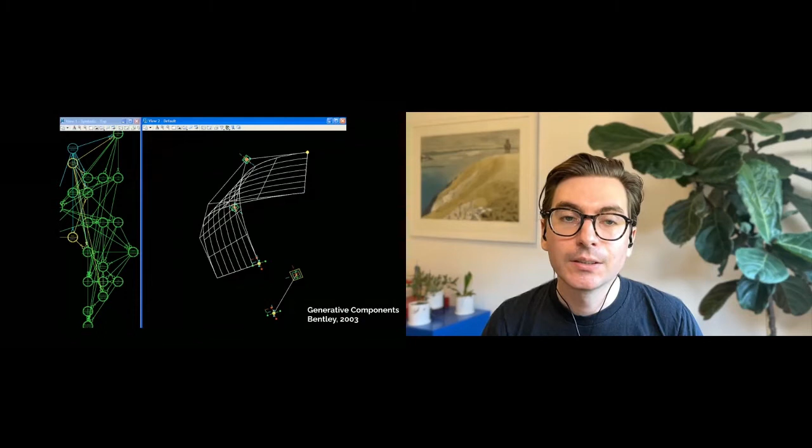So tools like Rhino and Grasshopper became popular, not because of how efficiently they did the regular stuff, like the vertical walls present in 99% of projects, but rather their ability to do the unique stuff. And CAD companies took note and followed suit, releasing updates to their software that really stretched the ability of software to reach further and further down that uniqueness spectrum.

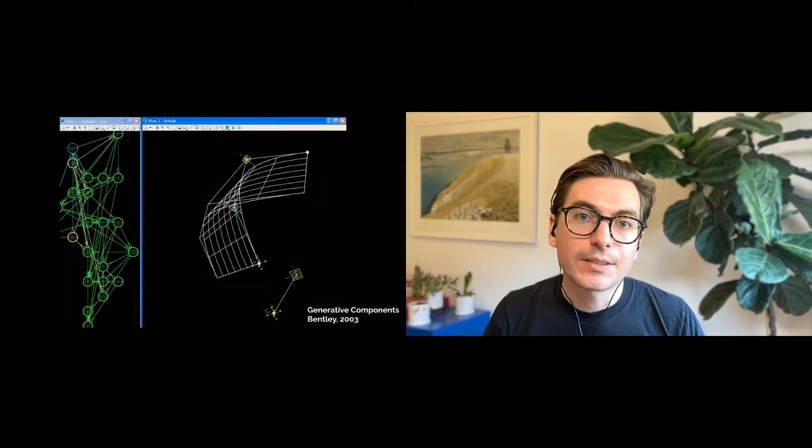Designers weren't just pushing the boundaries of uniqueness for the sport of it. Underlying all these efforts was a feeling that architecture was limited by its design tools. By pushing against these constraints, there was this implicit hope that it would expand the design vocabulary and open up new avenues of expression.

The first projects might be challenging, but presumably everything would become easier with time. If you take that to the logical extreme, you end up in a place like parametricism, which is predicting that the long tail is going to flip, right? That advances in design technology would progress to such a degree that soon every building would be unique, irregular, curved and different.

And of course, this didn't happen. Instead, we seem to basically reach a point of diminishing returns. So projects with doubly curved surfaces and parametrically generated facades began to feel like this magic trick that was used one too many times. The outcome was no longer surprising.

And without the novelty, there wasn't that much worth celebrating. The buildings weren't any more affordable, more abundant, more sustainable, or necessarily more pleasant to inhabit. As such, I think you're starting to see that the enthusiasm for the long tail is beginning to wane. And in its place, people appear to be shifting their focus to the middle of the uniqueness spectrum.

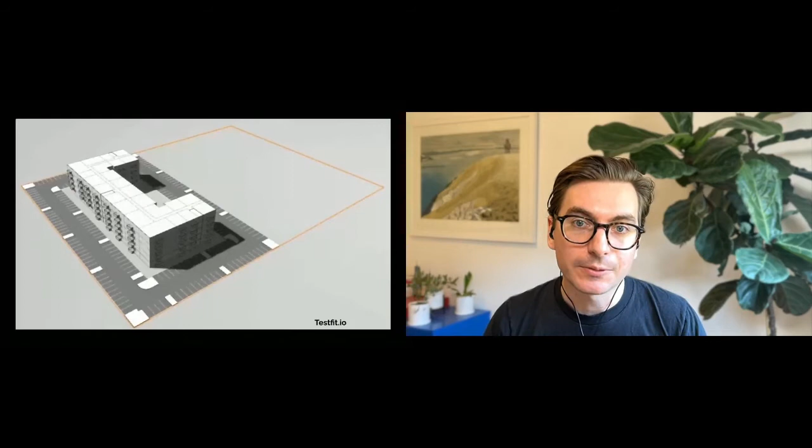It sounds simple enough, but having software automatically generate a building is actually pretty cutting edge stuff. A decade ago, you would only find this level of computational prowess on really big, expensive projects by famous architects. But here it's being applied to ordinary apartment buildings, car parks, and hotels.

And these are projects that are right in the middle of the uniqueness spectrum. Each project is a little different, normally due to site constraints, but they never stray too far from a template of fairly conventional project topologies. And I don't know, that's fine.

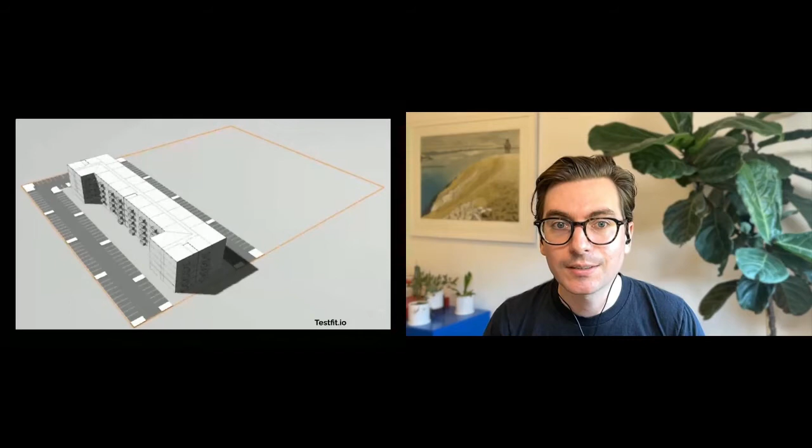I saw a similar thing when I was working at WeWork a couple of years ago. Back then, WeWork had this incredibly sophisticated method for delivering projects. Technologically, it was far beyond anything I'd seen anywhere else in the industry. But when you walked into WeWork's co-working spaces, it just looked like a regular office with nice chairs and fancy couches. So although there was this computational sophistication, it wasn't necessarily overly expressed in the design.

Just to give you a sense of some of what was happening on the back end here, this is a project that was done by, or led by, Carlo Bailey at WeWork and the research team. Here's basically making predictions about which offices would sell. So taking all of this Revit information that WeWork had, extracting all of that.

Well, there was another team extracting all that data and turning it into a database. Then he took all of that data from the database, combined it with all the sales databases, and then used machine learning to make predictions about which offices were going to sell based on physical attributes of the office. So really sophisticated combination of BIM data, operational data, machine learning.

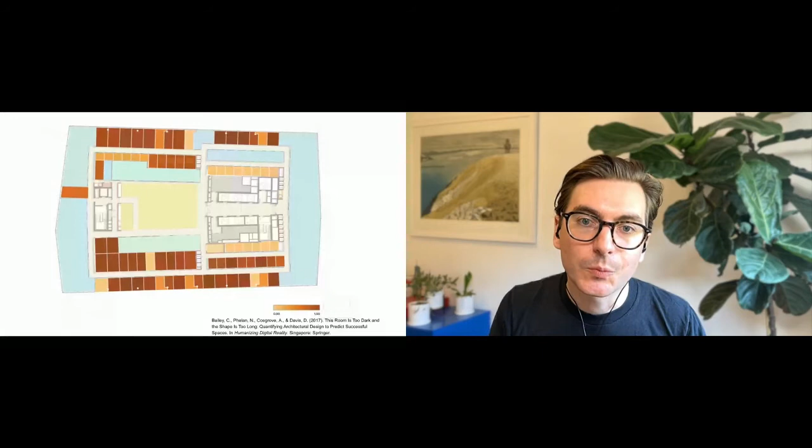But when you walked into a WeWork office, there's nothing that was sort of screaming like, this is the absolute pinnacle of what's possible in CAD right now. This is the product of these really advanced computational algorithms and laser scanning and this really polished pipeline of BIM data. This is what $1 billion in venture funding from the Saudi government buys you. It just looks like a normal kind of office.

And so I find this shift to the middle interesting because you're seeing so much computational expertise at the moment being brought to bear on what are really just such ordinary projects. And I know that calling these projects ordinary sounds like a critique, particularly if you come from a generation where you were rewarded for these difficult and unusual projects.

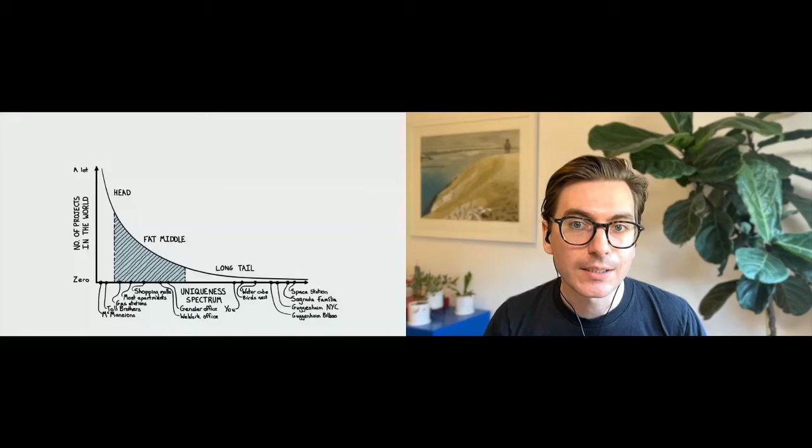But I think there's a dignity in the ordinary. Now, most of the built environment isn't landmark projects with big budgets. It's normal, inconspicuous projects that you don't really think twice about. And I think this is really where one of the opportunities lies, the fat middle of architecture.

These projects are challenging because there are so many financial constraints on them, so you can't afford to get too wild in what you're designing. But then there's also this overlay of practical considerations. You can't duplicate past work and expect it to work on a new site because the sites are so constrained and because there are so many other constraints on them.

And in many ways, I think it's the perfect problem for computational design. And more, I think you're going to see CAD turn its attention to this segment of architecture, shying away from the extraordinary in favor of making ordinary buildings better.

The second concept I want to explore here is the idea of verticals over horizontals.

So in the lead up to getting married, I had to get a ring. And obviously, buying a ring is a huge story, but I'll just tell you one tiny unexpected detail. The jeweler used Rhino to design the ring. This isn't part of the engagement story I normally tell my family, but since you're all here to hear about the future of CAD, the jeweler using Rhino, to me, it's a big deal.

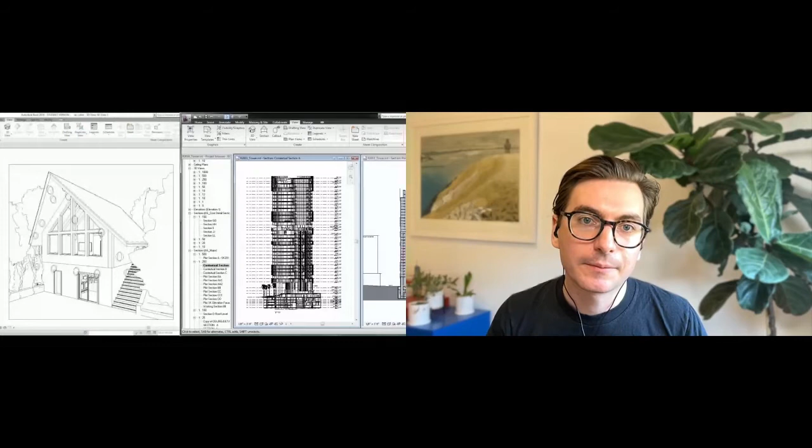These two things are totally different, yet we expect Revit to accommodate both of them and then some. Because Revit stretches across so many different project topologies, it struggles with the specifics of each of them.

For example, people have been using Revit to design apartment buildings, and they've been complaining for over a decade that Revit can't count the number of units in a building. There are screenshots from the Revit forum back in, I think, 2011, people complaining about Revit not being able to count apartment buildings. Sure, you can mess around with room schedules and write a Dynamo script, or buy a plugin to export and display this data. But all of that feels like a really complicated workaround.

Software that specializes in designing apartments, such as TestFit, performs these calculations out of the box. So why does Revit make it so difficult?

Many of us will blame Autodesk and say they're not listening or moving too slowly. There's been this open letter to Autodesk recently, and this is an article I wrote about it. But I'd like to posit an alternative explanation other than 'Autodesk is lazy.'

I think that's really that Revit is horizontally integrated. In most cases, it's better for Autodesk to add features that benefit their entire user base rather than adding features that serve only one vertical.

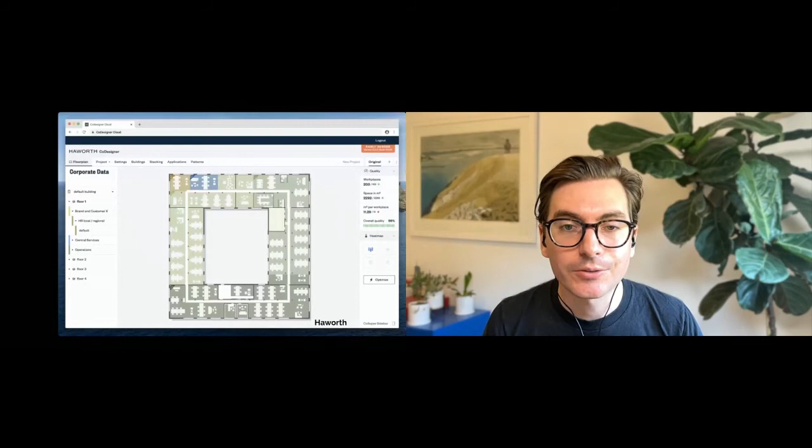So one example of what this might look like is Haworth's CoDesigner. For those who don't know, Haworth is a furniture company, and they made this design software, or contracted out to another party to make it for them. They give away the software basically as a sales tool.

You can see already just from the screenshot that out of the box, they're doing a bunch of calculations, such as counting the number of workstations, calculating the density of the workspace, even scoring the quality of the workspace. All these calculations are definitely possible in software like Revit, but would take a lot to set up. Here they're all out of the box, ready to go.

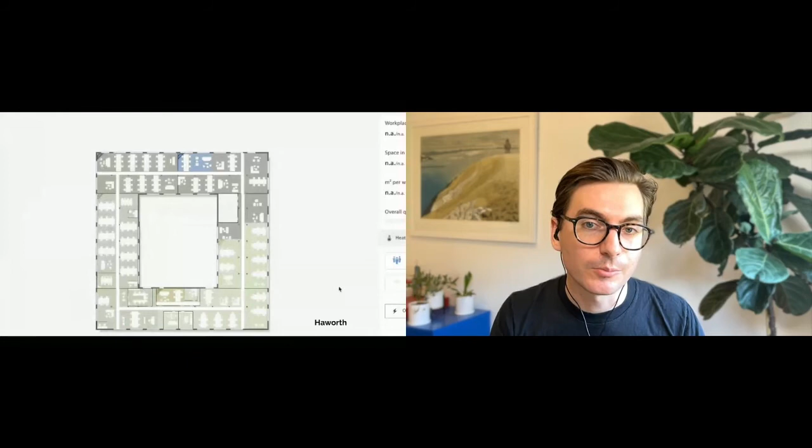This GIF is super fast, and I'm not sure if it'll show up for you, but basically in their software you can just drag rooms around. So it's generative, interactive, and you can move things about.

This is probably one of the more interesting parts of their software. What you're seeing here is a stacking diagram. In office design, it's typical to have all the floors represented and work out which departments fit into which floors. Typically, workplace strategists or architects will use something like Excel or Illustrator to create a diagram like this, so it's totally disconnected from the design process. You basically create the stacking diagram, look at it, use it, and then throw it away because the design exists in another piece of software.

But here, because it's done in their software, which is focused on this one vertical, when you make this change to the stacking diagram, changing where particular departments are within the office, it automatically changes the floor plan. So you have this vertical flow of data from the early stages of briefing through to the finalized layout, going backwards and forwards in this software.

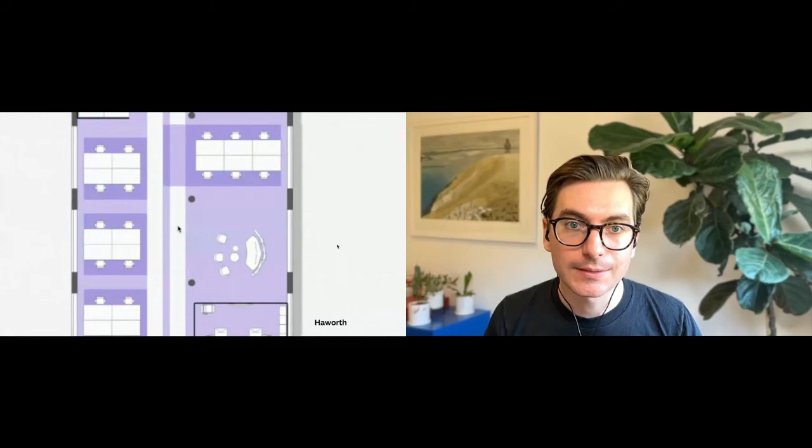It also has a bunch of generative stuff around placing desks. Again, this isn't impossible in other software, but because it's baked in, it's much easier for people to access. There's this interactive corridor tool, which shows off some of their bidirectional generative design capabilities, doing things like evaluating floor plans based on metrics that are important for people laying out offices.

So basically what you have is this very specific application designed for an incredibly narrow vertical. You can't use Haworth CoDesigner to design a house, a stadium, or a cultural institution. You can't even design the outside of an office building. All you can design within it is the interior layout of where desks and furniture are within an existing office building.

And because it focuses on this one vertical, you get a lot of things out of the box that just aren't available in other software, or that would have been possible but are really tricky to implement. It's just an interesting example of what the future might hold, particularly when you have a furniture manufacturer making this incredibly sophisticated interactive generative tool just for the purpose of sales.

The final concept I'll touch on briefly is the idea of made-to-measure versus mass production. To be fair, this is probably the least thought-out section of the presentation, so it'll be somewhat brief, but I'd love to get your feedback on this as well.

I think in the industry we really have this obsession with making architecture like we make cars and planes. This goes back decades, but I pulled out a couple of examples of recent startups that have been talking about their design process in relation to industrialization, using cars and planes as a metaphor.

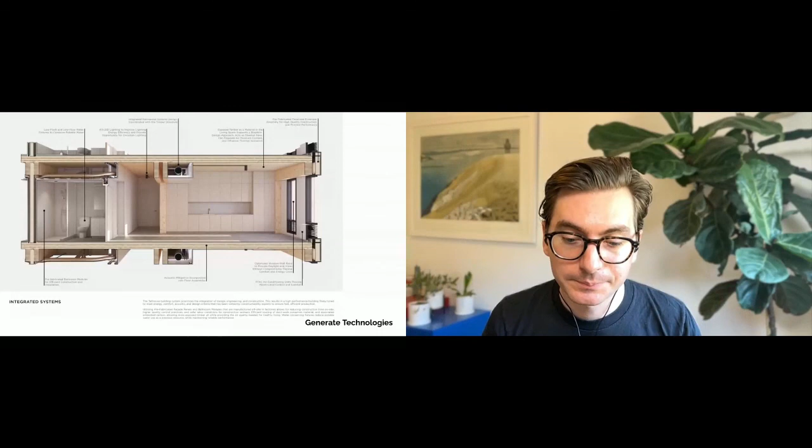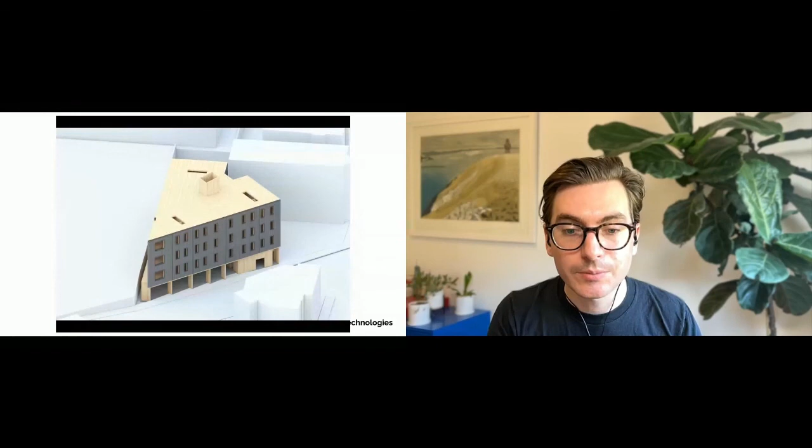They have this underlying pattern that they're using—a system of connecting the structure, and a formula for the way things come together. But the projects they work on aren't one-size-fits-all. The site in this particular project is very constrained, very unusual, with kind of weird diagonals. They have a way of adjusting what they're doing to fit that site. So it's neither totally bespoke, in that what they're doing has this underlying construction logic, nor completely modular, in that it's being adjusted to fit onto that site.

And the projects they produce are really nice, sensible, good—sort of the fat middle of architecture using these computational techniques.

So to summarize this presentation, there are three things I think we're going to increasingly see in CAD and design in coming years. One is this shift from focusing on really unique one-off buildings using computational design, to using computational design to make the fat middle of architecture better, faster, and higher quality.

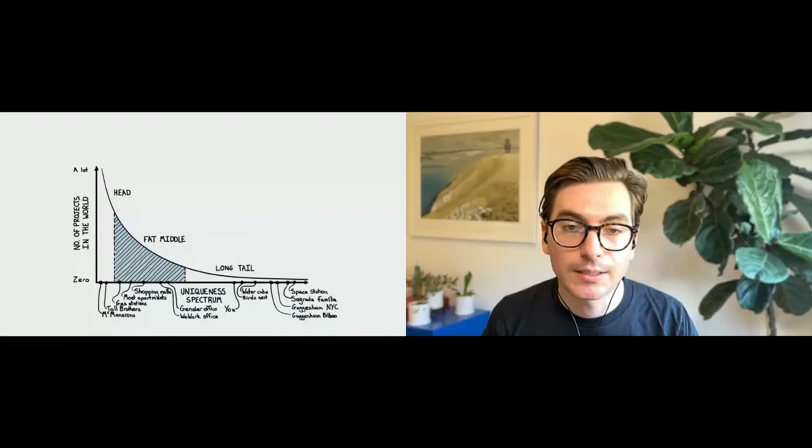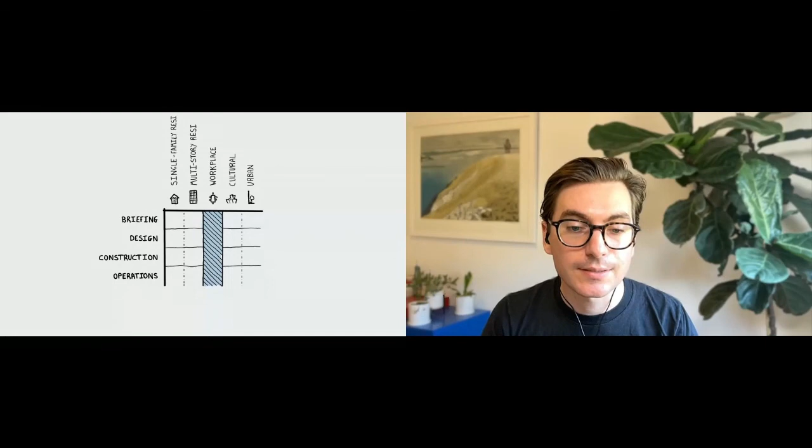The second is this focus on software going from serving horizontal markets—where it doesn't necessarily do particularly well in either data exchange or focus on given features—to these verticals, where there may be particular tools tailored to really narrow verticals in the industry, and firms that focus instead of wide and generalized, on these very narrow parts of the industry.

And finally, there's a shift from thinking about architecture as being either completely bespoke or completely modular, to architecture that's enabled by computational design to be more made to measure—having these underlying facets thought out and worked out ahead of time, but adjusted to fit onto every body or every site that exists.

So those are the three. Yeah, and that'll be the end of the presentation.